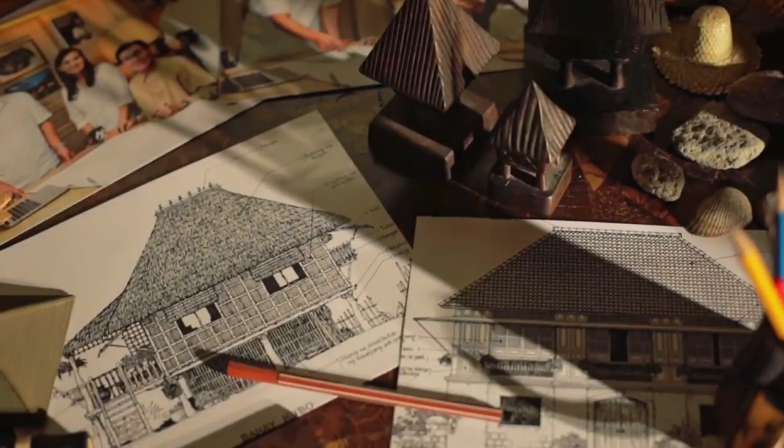Vernacular architecture shall be the approach to be applied in this proposal to emphasize the Philippine culture. One of the features that shall be discussed in this study is the use of natural ventilation, especially in the lobby, to reduce the energy consumption and the carbon footprint itself. Aside from that, the visualization of the Philippine culture, history, and architecture shall be the focal point of this proposal. This is to promote the appreciation of nature and the relationship towards the users. With the said description, this shall be the context of this presentation.

So, did I get your attention?

With the growing economy, alongside the tangible infrastructures, these are the following issues that shall be tackled in this study: lack of enough promotion of Philippine culture and architecture in temporary shelters, lack of visualization of Philippine architecture and greeneries, lack of nature appreciation spaces, and the increase of carbon footprint.

The objectives of this study are the following: to discuss the different strategies that our ancestors used back then in their structures, the study aims to utilize indigenous materials' unique properties in a contemporary modern building.

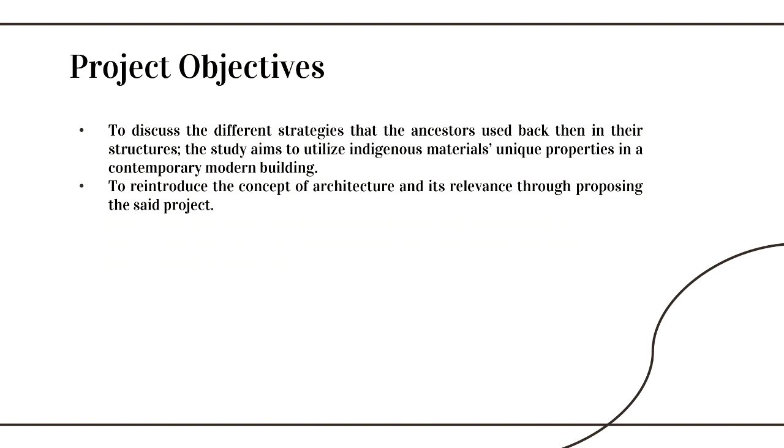To reintroduce the concept of architecture and its relevance through proposing the said project. To achieve a fully functional hotel design without any compromise to aesthetics and services, and to create a built environment that would reflect the traditional and contemporary architecture.

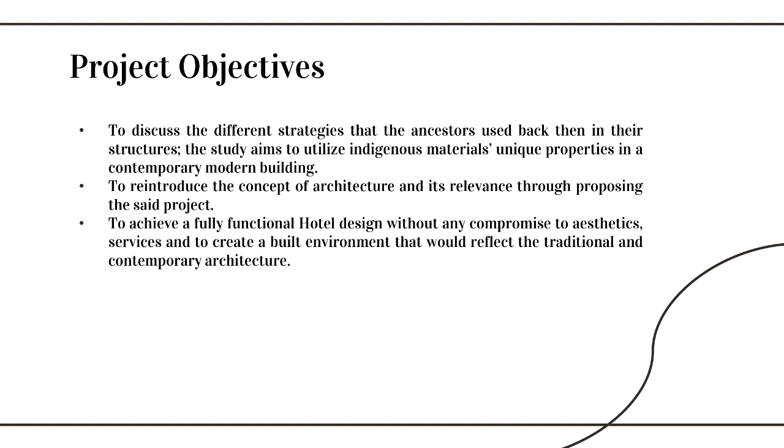To reduce the carbon footprint that caused massive damage to the environment. To propose a facility that enhances the environment, not just in terms of the region, but also the welfare of the target users. To design a structure that corresponds to nature and shall focus on how indigenous materials can play well with other materials such as steel, wood, concrete, and glass without losing its soul.

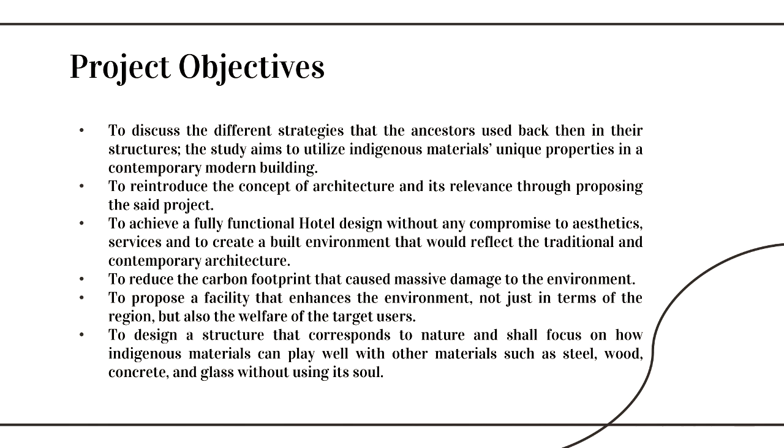Ayala Land is currently headed by its CEO Bernard Vincent O. Dy, and as one of the biggest and leading property developers in the Philippines, Ayala Land was established in the year 1988. Their group started as the Hacienda Makati, which was listed in both Manila and Makati Stock Exchanges in July 1991. They are also known for the massive landscaping.

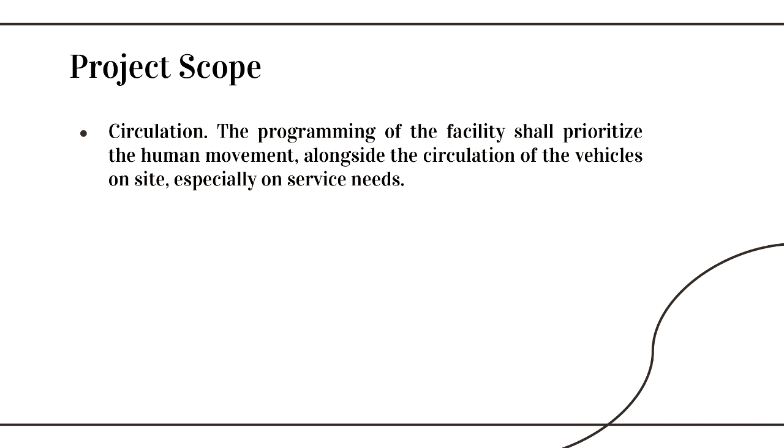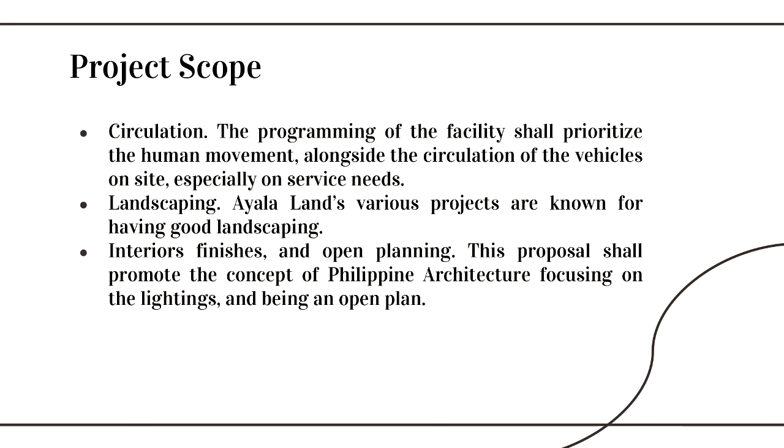The programming of the facility shall prioritize the human movement alongside the circulation of the vehicles on site, especially on service needs. Ayala Land's various projects are known for having good landscaping. This proposal shall promote the concept of Philippine architecture, focusing on the lightings and being an open plan. Due to inconsistency of material rates and other natural factors, the project time's completion shall not be tackled in the study; only basic concepts and theory shall be discussed.

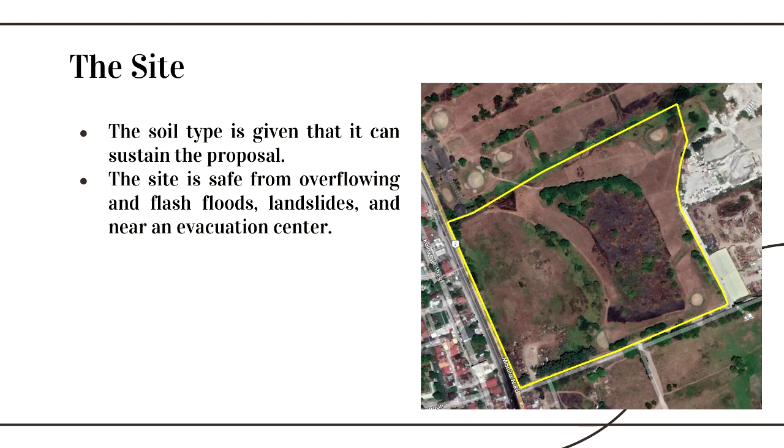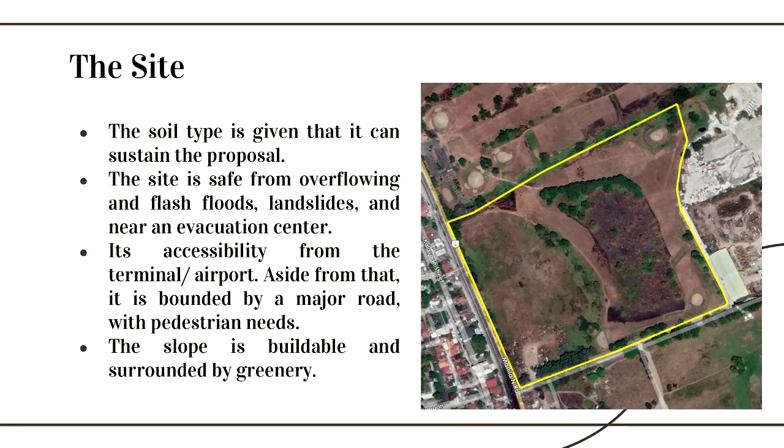The soil type is given that it can sustain the proposal. Aside from that, it is also safe from overflowing and flash floods, landslides, and near an evacuation center. It is accessible from the terminal or airport, and also bounded by a major road with pedestrian needs. The slope is buildable and surrounded by greenery.

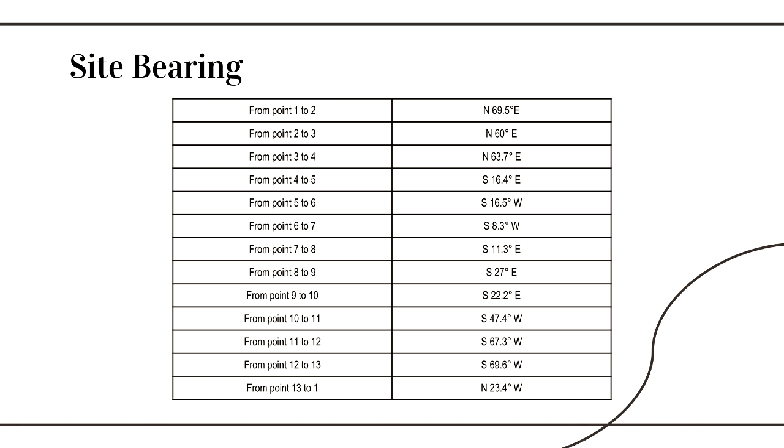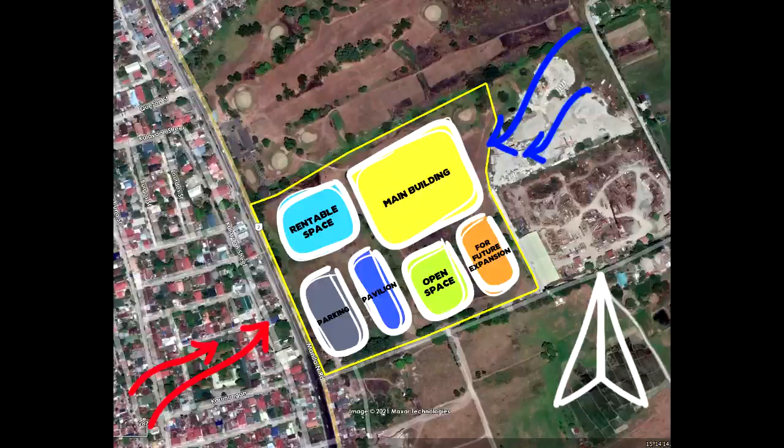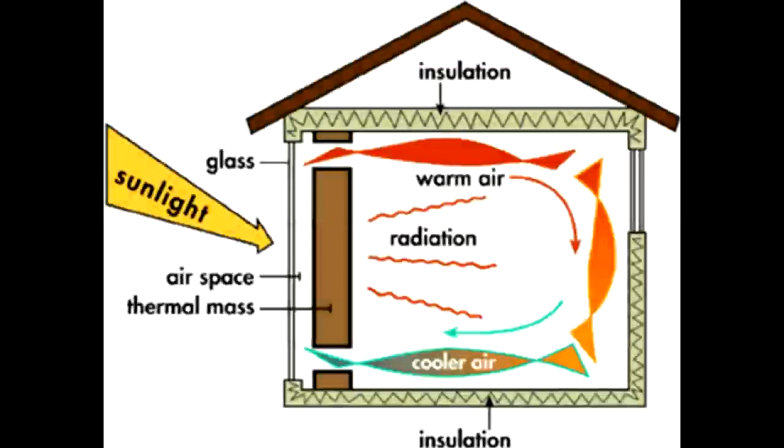Passive cooling architecture: the concept of passive cooling architecture shall play a dominant role in this proposal. This promotes the idea of placing an opening to the most suitable and favorable orientation. Aside from that, this can also lessen the energy consumption of the building.

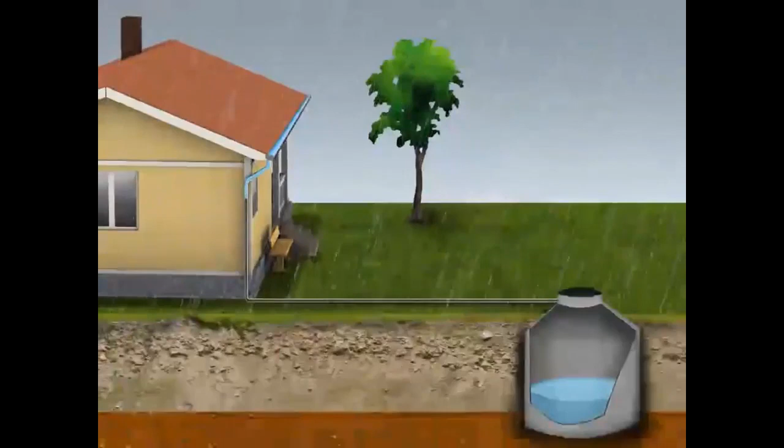Rainwater harvesting: the concept of rainwater harvesting shall be implemented in this proposed deluxe class hotel in Mabalacat, Pampanga. Rainwater harvesting is a strategy that stores rainwater from the roof, then filters it for use in emergency purposes, plant water, laundry, and flushing.

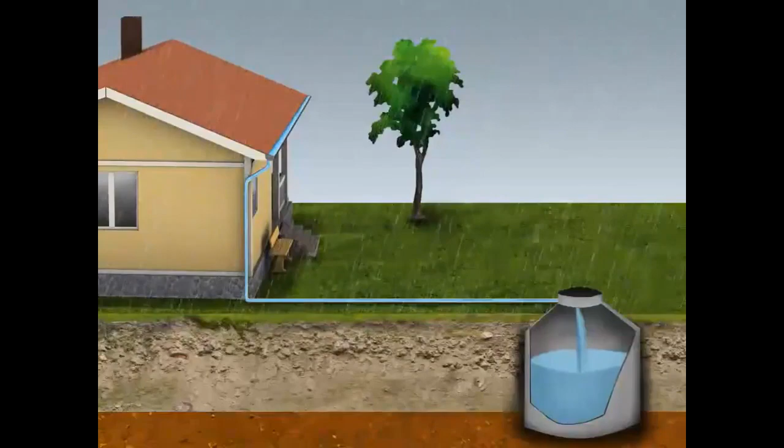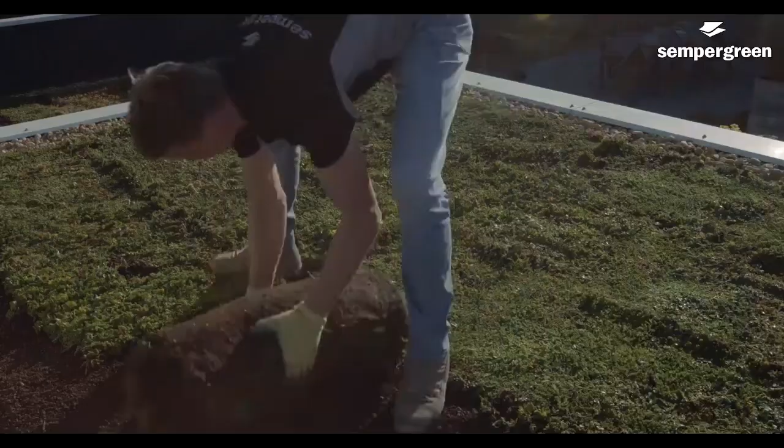Green roofing is known for its noticeable characteristics and its functionality in terms of enhancing not just the environment of the facility, but the location as well. It is said to be an effective way to control the temperature inside the building for the reason that it absorbs the heat coming from the busy roads. Aside from that, it also filters the air in the community.

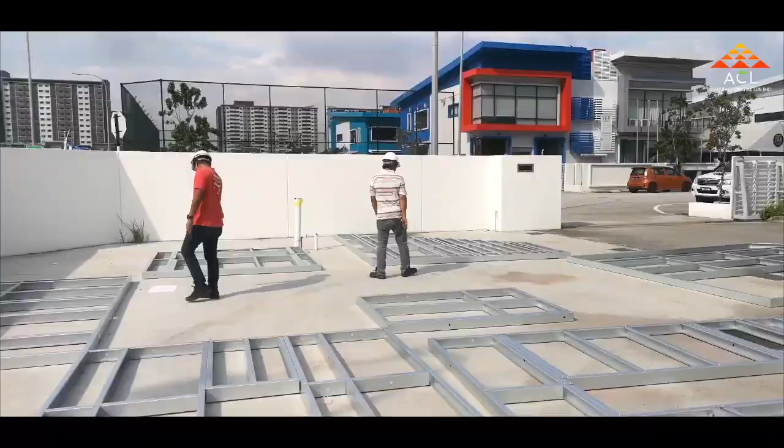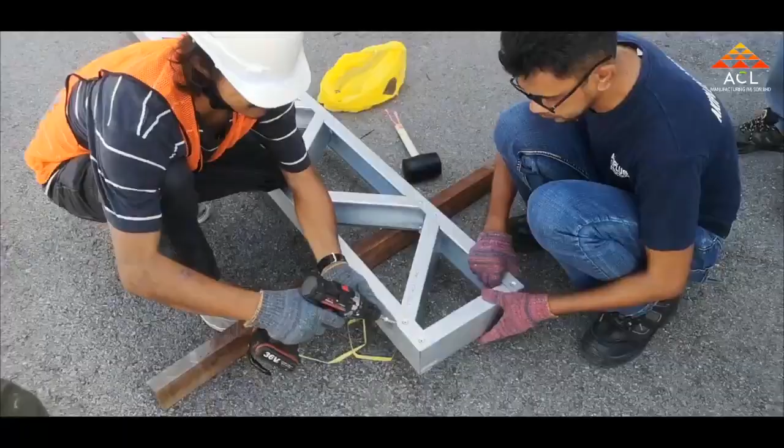Lightweight steel. A lightweight steel structure is known for its strength and durability. It is also said to be termite-proof and fire-resistant. Aside from these features, lightweight steel framing offers wide spaces that can be beneficial in terms of programming the proposed deluxe class hotel. Combining it with CLT, or cross-laminated timber, which is flexible and well-engineered, the designer can produce massive shapes.

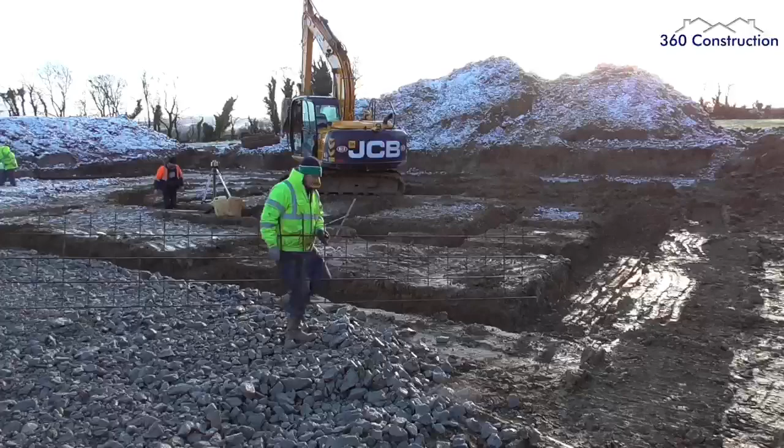Strip foundation. The site of the proposal is near the airport, so it is advisable to have a low to medium-rise building to avoid collision. Strip foundation is a type of shallow foundation commonly used by low to medium-rise buildings. This type of foundation provides continuous strip support to linear structures or closely spaced rows of columns.

Two-way slab. The concept of a two-way slab is carrying the load in both directions. It is also said to be a type of structural element that can withstand the maximum load without being disoriented or deformed. Long span beam.

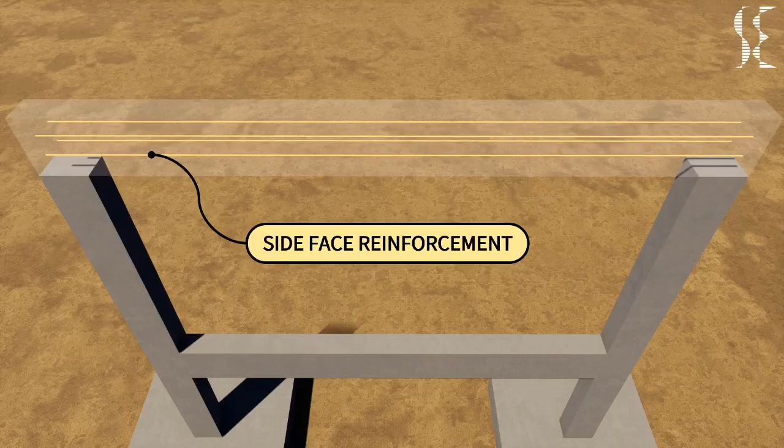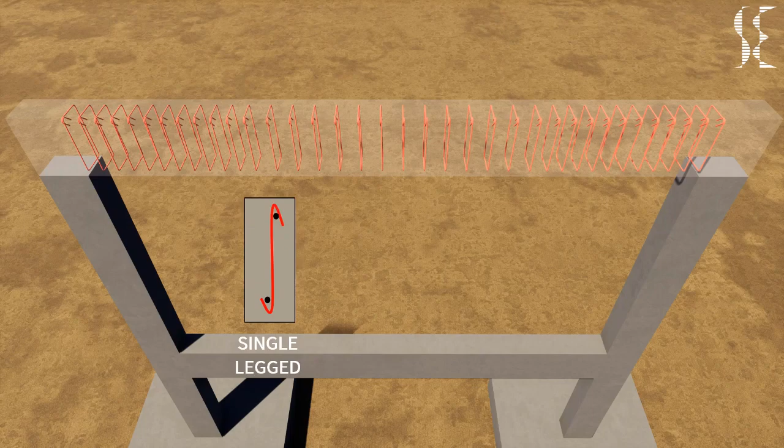One of the benefits of using a long span beam is that it provides more space since it is known for having a column-free strategy. This proposal shall provide wide spaces for utility, service, and emergency purposes that shall promote comfort in terms of the mobility of the users, including the staff.

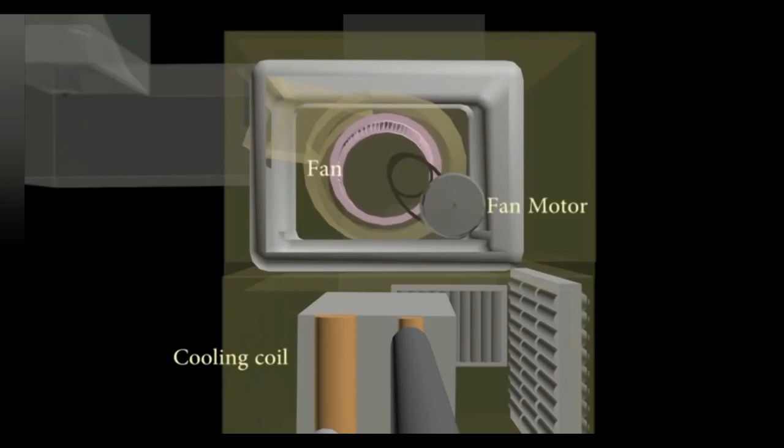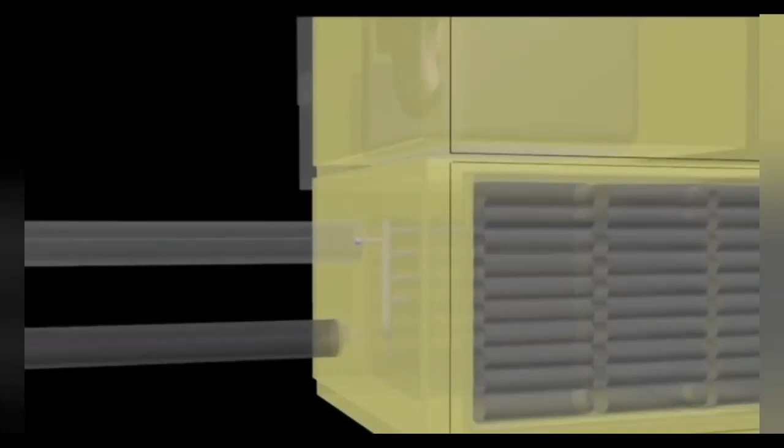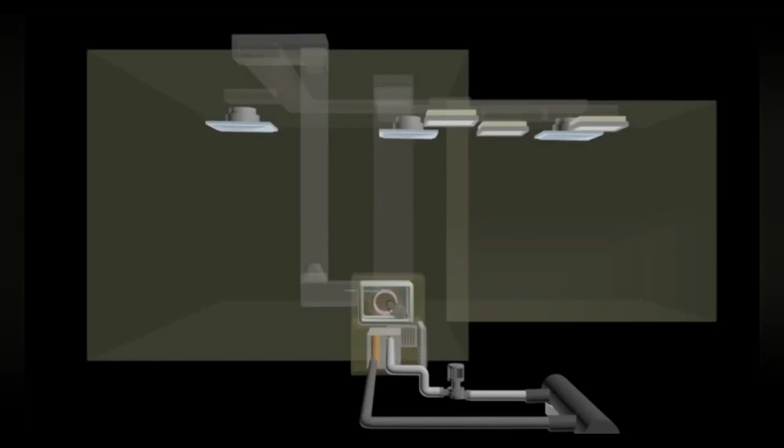Centralized aircon shall be used in hallways and other public areas in this proposal. It is said to use filters that improve the quality of air. Pollen and dust are eliminated by this type. Aside from this, a centralized air conditioner is the most effective way to circulate cool air through the building without producing unwanted noise. It offers more space since it is installed through the ceiling.

Going further, the split-type air conditioner is also present in this proposal. It shall be used in the rooms.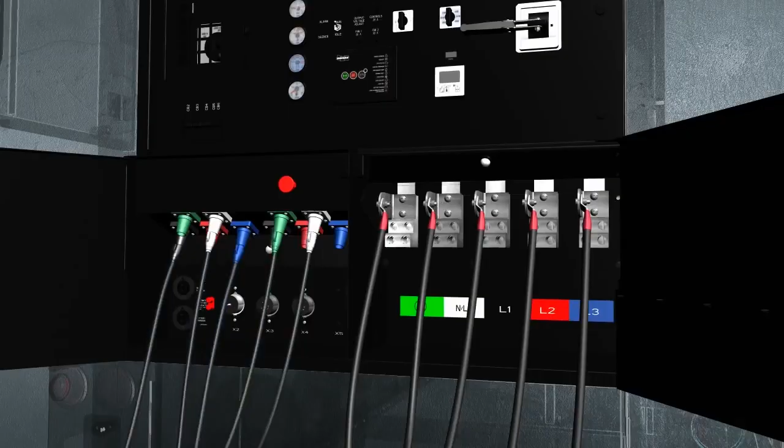Standby duty type generator set. Standby duty is the most favorable in residential and commercial dwellings. This type of generator set is automatically turned on when there is a power shortage. Standby duty type is advisable for buildings that need to be simultaneously supplied with energy, such as kitchen and basic appliances.

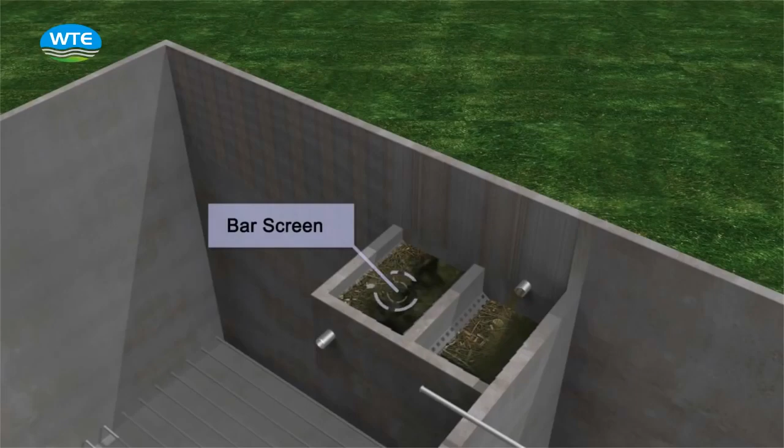Sewage treatment plant. The concept of the sewage treatment plant is also the same as a septic tank. It is also known for processing water to remove contaminants from the wastewater. Aside from that, it is said to have lesser odor emission than a septic tank.

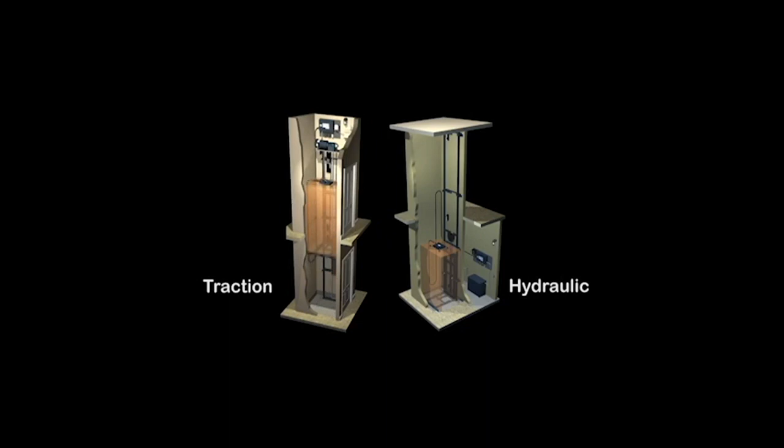Traction elevator is widely used for both mid and high-rise buildings and can operate faster than hydraulic elevators. This system uses a counterweight that also balances the weight of the occupants.

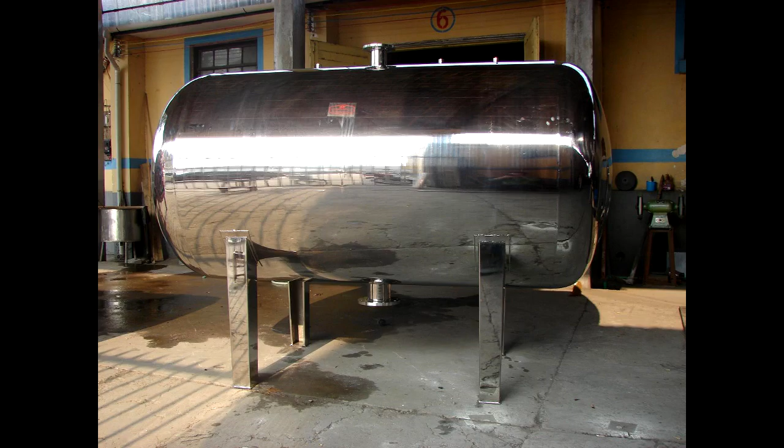A stainless water tank is less prone to contaminants since it has good resistance in terms of the said issue.

Fire and sound alarms shall be installed in this proposal to increase the security and safety of the users. Fire alarms can be triggered manually or by detecting heat and smoke.

Class A and Class C fire extinguishers shall be placed in every exitway per story. Class A is for ordinary combustible materials such as wood, cloth, paper, and more. While Class C is known as a type of hazard caused by faulty wiring and other electrical issues.

CCTV camera. Dome type shall be the type of CCTV camera installed in this proposed deluxe class hotel. It is said to be easy to place and compact. It can also rotate 360 degrees.

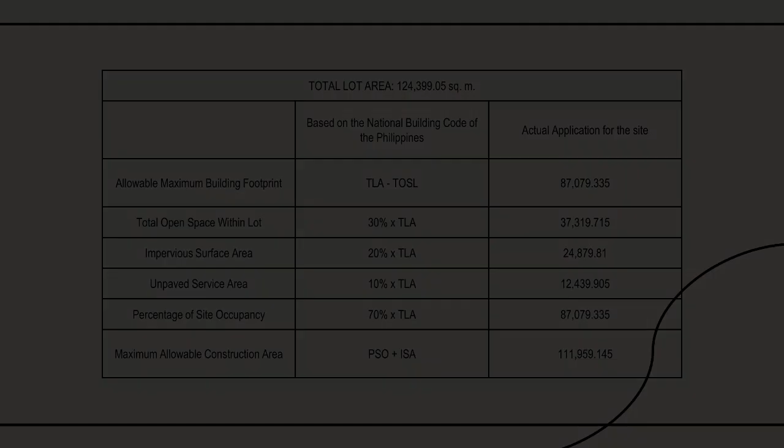The total lot area of the site is 124,399.05 square meters. This is the development controls according to the National Building Code of the Philippines.

Okada Manila, Conrad Manila, the Ritz-Carlton, and Lotte Hotel are used as references to get the demand analysis. Okada Manila has 43 hectares of lot area with 993 rooms. Conrad Manila has 8 hectares with 347 rooms. The Ritz-Carlton has 6.5 hectares with 247 rooms, and the Lotte Hotel has 7.1 hectares with 1015 rooms.

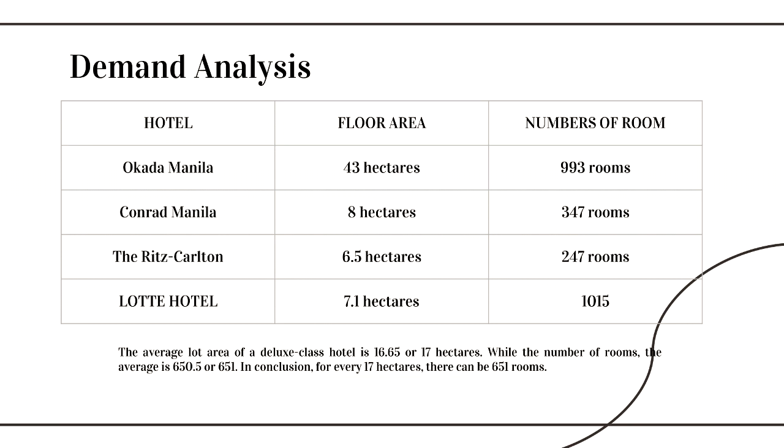With the said variables, the average lot area of a deluxe class hotel is 16.65, or 17 hectares, while the average number of rooms is 650.5, or 651. In conclusion, for every 17 hectares, there can be 651 rooms. Here is the matrix and bubble diagram.

The idea of additive and subtractive form shall be the theory applied in this proposal. A combination of the two theories will result in the usual aesthetic of Ayala Land's existing projects. In addition, adding and subtracting parts of a form can add more character without disregarding the original appearance of the said form.

Vernacular architecture is known to have a high-pitched roof that is beneficial to natural ventilation since it circulates air throughout the room. Aside from having a high-pitched roof, the color scheme of the building shall be earth colors. The facade design shall comply with the appearance of waves. The building's characteristic shall be a combination of dark blue and dominant white with warm lights, alongside wooden floors and bamboo wall cladding.

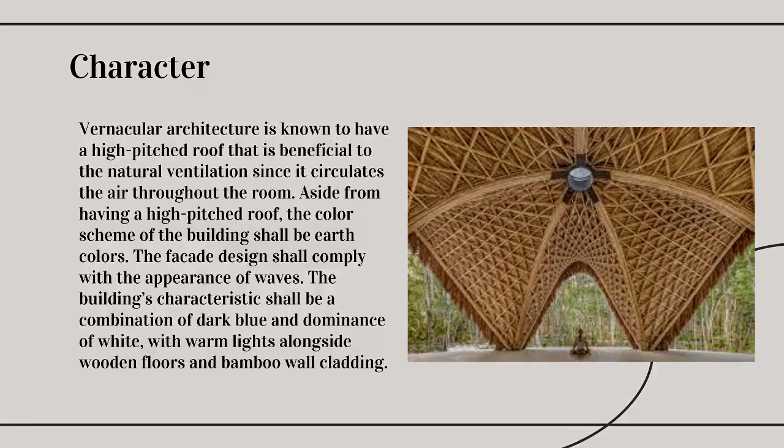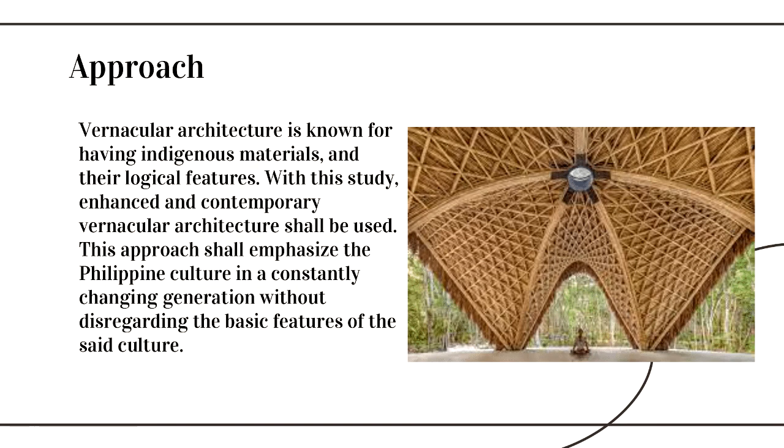Vernacular architecture is known for having indigenous materials and logical features. With this study, enhanced and contemporary vernacular architecture shall be used. This approach shall emphasize Philippine culture in a constantly changing generation without disregarding the basic features of the said culture.

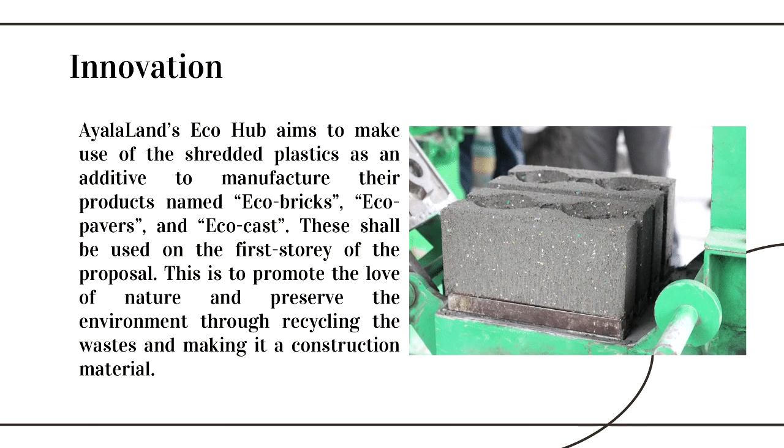Ayala Land's Eco Hub aims to make use of shredded plastics as an additive to manufacture their products named Eco Bricks, Eco Pavers, and Eco Cast. These shall be used in the first story of the proposal to promote the love of nature and preserve the environment through recycling waste and making it a construction material.

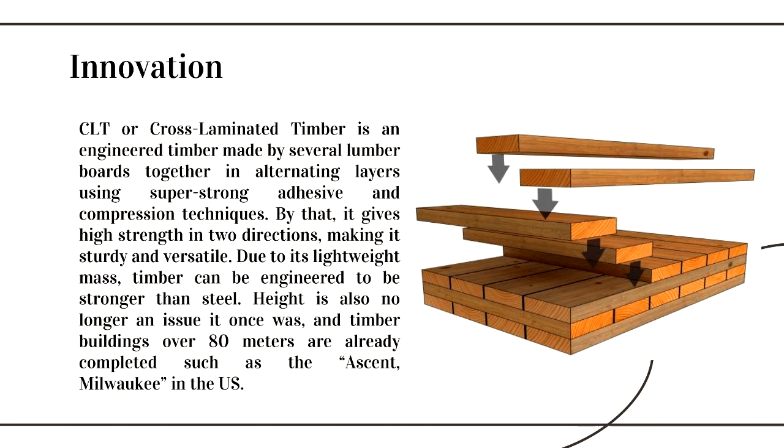CLT, or cross-laminated timber, is an engineered timber made by layering several lumber boards together in alternating directions using strong adhesive and compression techniques. This gives it high strength in two directions, making it sturdy and versatile. Due to its lightweight mass, timber can be engineered to be stronger than steel. Height is also no longer the issue it once was, and timber buildings over 80 meters have already been completed, such as the Ascent Milwaukee in the US.

Upon entering the proposal, visitors shall be greeted with a presentation of gateways made of bamboo. With the rich culture of the Philippines, never having been fully colonized, the ancestors had the freedom to innovate and make use of the environment according to their lifestyle, needs, and beliefs. This gateway is the visual representation of the enhanced methodology that the ancestors used during their era.

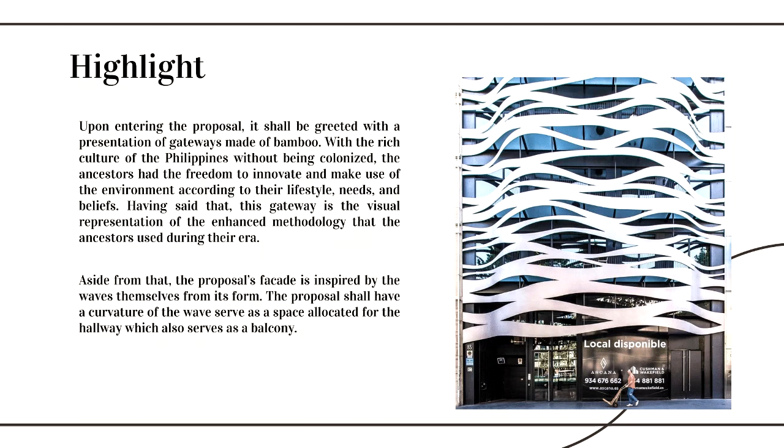Aside from that, the proposal's facade is inspired by the form of waves. The proposal shall have a curvature resembling a wave, which serves as a space allocated for the hallway, which also functions as a balcony. Here are the proposed form concepts.

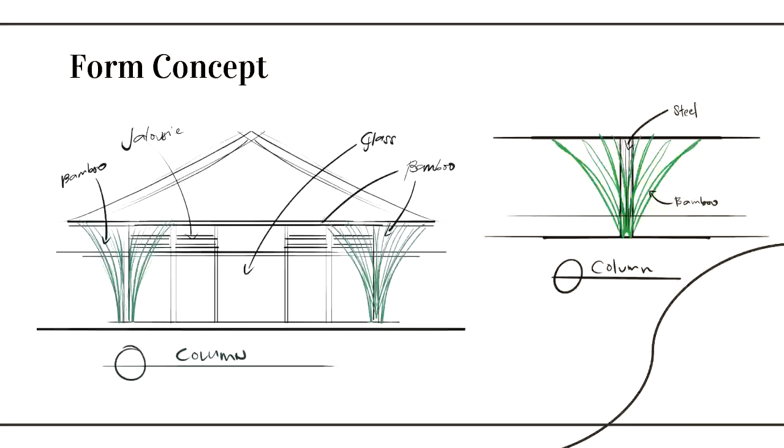The site is bounded by two roads and is 5 kilometers away from the airport. Placing a tree that grows faster than usual as a sound buffer is one of the solutions to reduce noise coming from vehicles and aircraft passing through the perimeter.

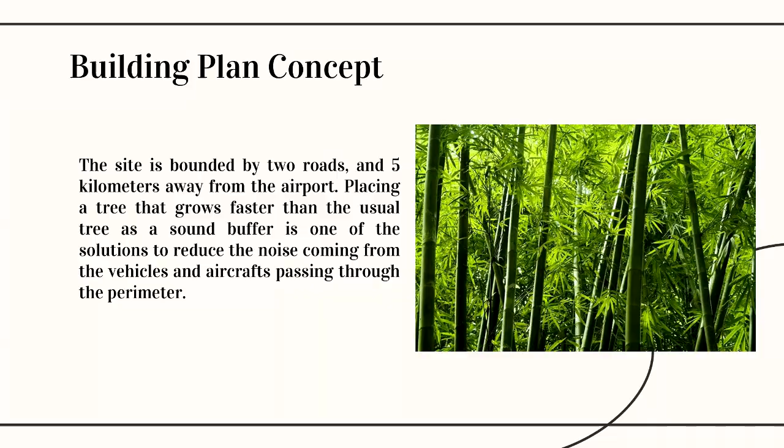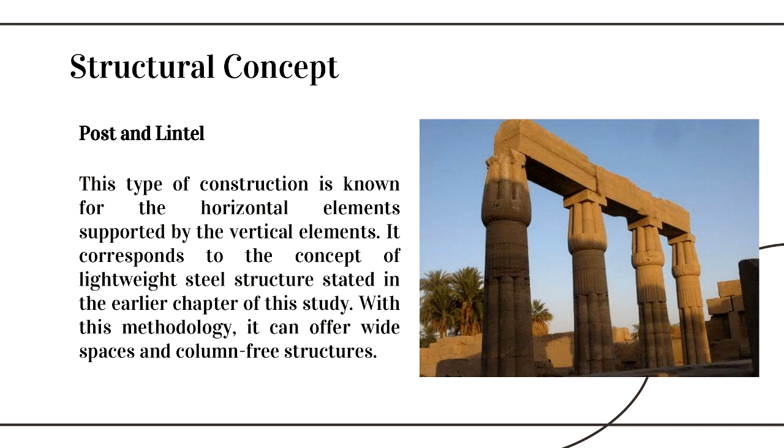This type of construction is known for horizontal elements supported by vertical elements. It corresponds to the concept of lightweight steel structures stated in an earlier chapter of this study. With this methodology, it can offer wide spaces and column-free structures. Bamboo will be used mainly for structural and aesthetic purposes.

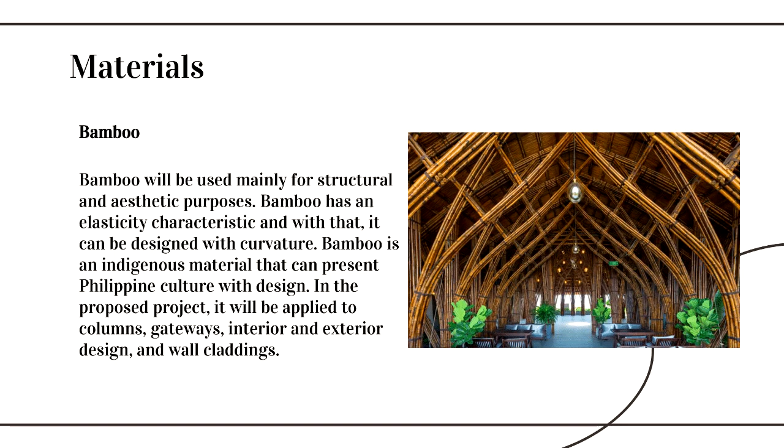Bamboo has elasticity characteristics, and with that, it can be designed with curvature. Bamboo is an indigenous material that can present Philippine culture through design. In the proposed project, it will be applied to columns, gateways, interior and exterior design, and wall claddings.

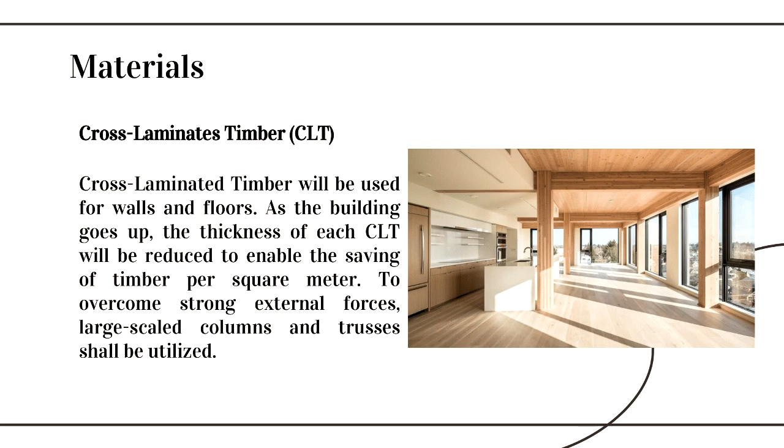Cross-laminated timber will be used for walls and floors. As the building goes up, the thickness of each CLT panel will be reduced to enable savings of timber per square meter. To overcome strong external forces, large-scale columns and trusses shall be utilized.

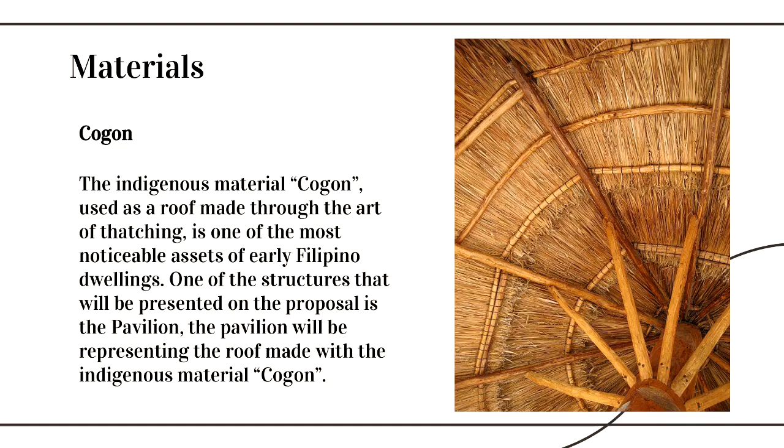The indigenous material cogon, used as a roof made through the art of thatching, is one of the most noticeable assets of early Filipino dwellings. One of the structures presented in the proposal is the pavilion, which will represent the roof made with the indigenous material cogon.

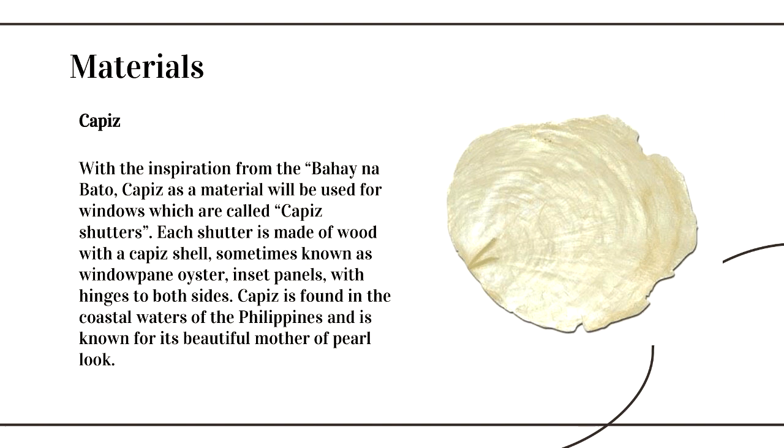With inspiration from the bahay na bato, Capiz will be used as a material for windows, called Capiz shutters. Each shutter is made of wood with capiz shell, sometimes known as window pane oyster, inset panels, with hinges on both sides. Capiz is found in the coastal waters of the Philippines and is known for its beautiful mother-of-pearl look.

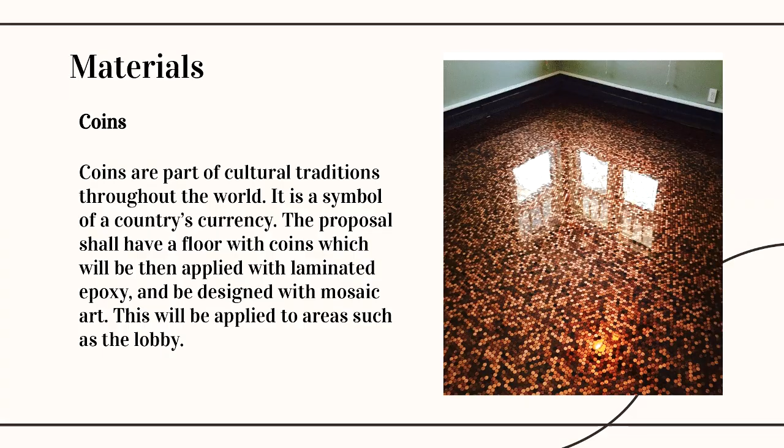Coins are part of cultural traditions throughout the world and are a symbol of a country's currency. The proposal shall have a floor with coins applied with laminated epoxy and designed with mosaic art, applied to areas such as the lobby.

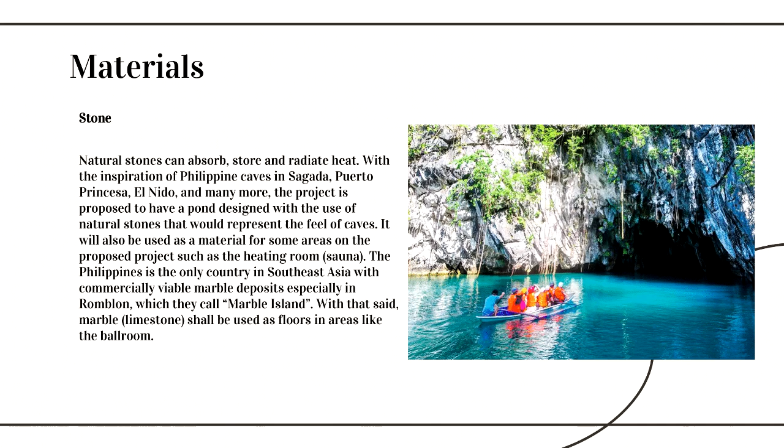Natural stones can absorb, store, and radiate heat. Inspired by Philippine sites like Sagada, Puerto Princesa, El Nido, and many more, the project proposes a pond designed with natural stones that represent the feel of caves. It will also be used as a material in areas such as the heating room or sauna. The Philippines is the only country in Southeast Asia with commercially viable marble deposits, especially in Romblon, known as Marble Island. With that said, marble or limestone shall be used as flooring in areas like the ballroom.